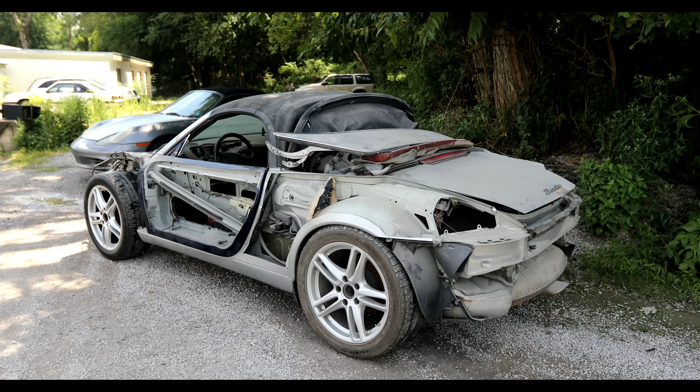We bought a Boxster for $500 and saved it from the junkyard. Then we took that Boxster, slapped a V8 into it, and are transforming it into a vintage supercar. This is Project Jigsaw. There is something major that needs to happen so that we can actually drive Jigsaw. And what that is, this trailing arm that we have mocked up needs to be remade and finalized. Otherwise, this thing is 100% undrivable because it's 100% unsafe.

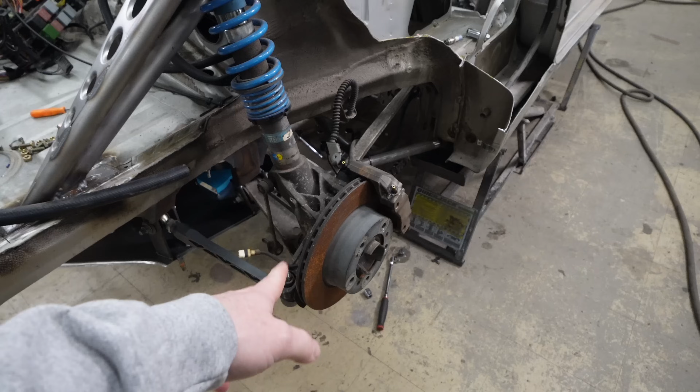Now, because we extended the wheelbase, we had to extend this rear trailing arm. Right now, it's just mocked up with some flat steel, just so we can lock it into place. But if we were to try to drive it, this would just wobble in and out, and it would be a complete mess and not work.

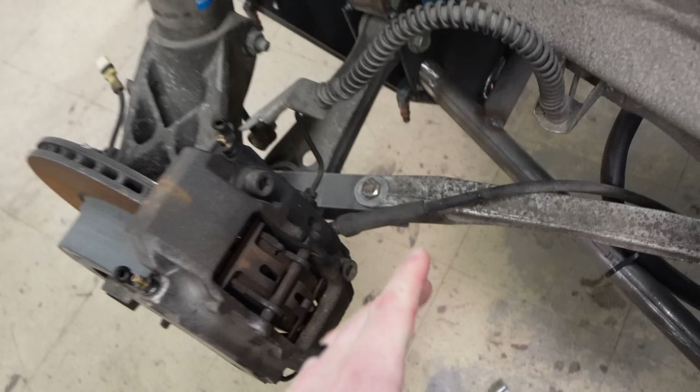So my plan here is to 3D scan the arm that we have mocked up, redo it in CAD, and then we're gonna send that file out to have it machined. It should save us a bunch of time, and it should be a really cool end product.

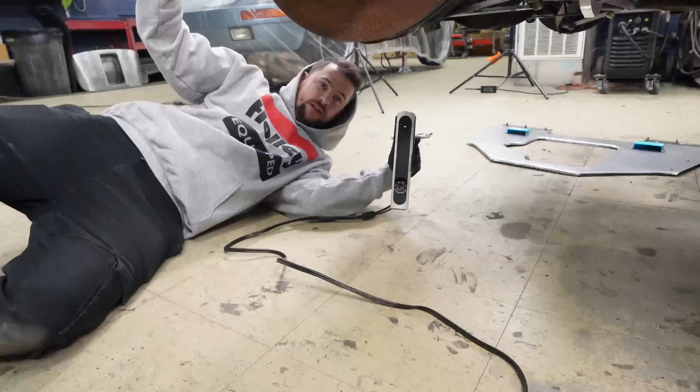Look at your hands on there, Tony. Nice. I want you to 3D print that for me. No.

Definitely gonna have to curve the arm. That's what these tests are for. Yeah, something like that.

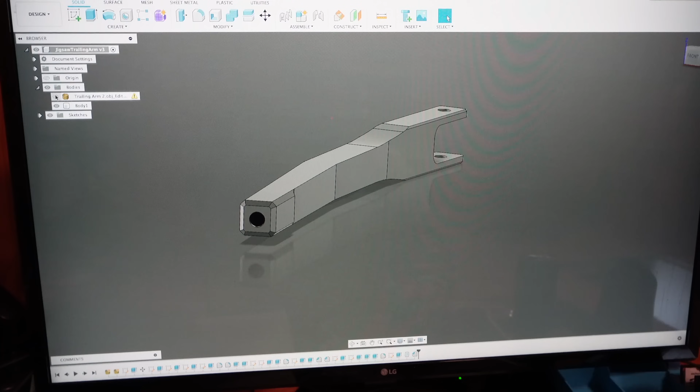Now that the arm is designed, I'm gonna 3D print it and make sure it fits before we pay a lot of money to have it actually machined. I got this print to be the exact height of the max of my Sidewinder X2 printer. So let's hope that nothing fails over the weekend. I'll check it on Monday morning.

There it is. Tony. Yeah.

All right, so here we got my bionic thumb with magnetic tip. I can almost pick things up without the rest of my fingers. Edward Scissor thumbs, but the Wish app version because it doesn't actually work. You know, it's just like the Bionic Man. You get damaged, and then you just build it back better. I mean, it's better than looking at your stupid thumbnail, or lack of it.

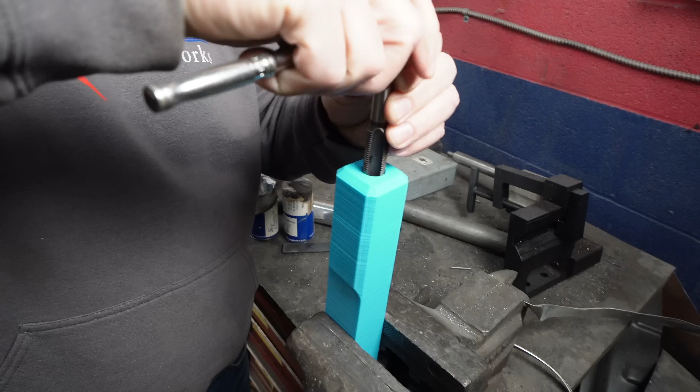We're gonna tap these threads because 3D printed threads are never that great for use like this. Tap's running in real easy though. Yeah, they printed really nicely.

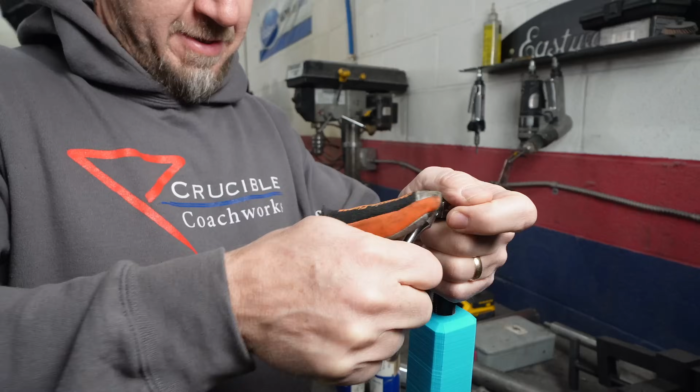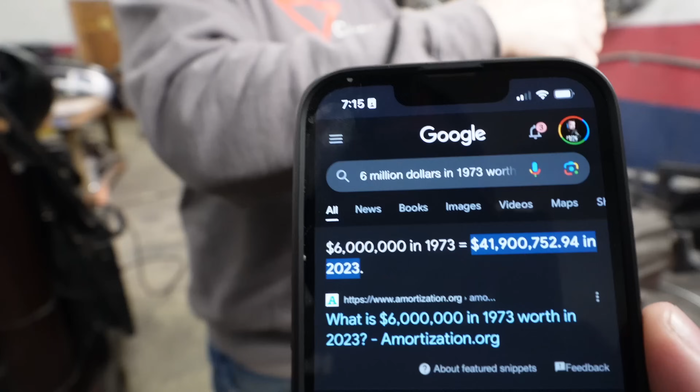I think Amos had it right though. You're the $6 man, not the $6 million man. I don't know if you can buy this for $6. In this economy, no way. How much do you think the $6 million man would cost in today's dollars? All right, so we're talking 1973, right? Okay. What do you think it is worth today? 64 million. You're way higher than I thought you would have guessed. It's 41.9. Okay. That's a lot of money. It sure is.

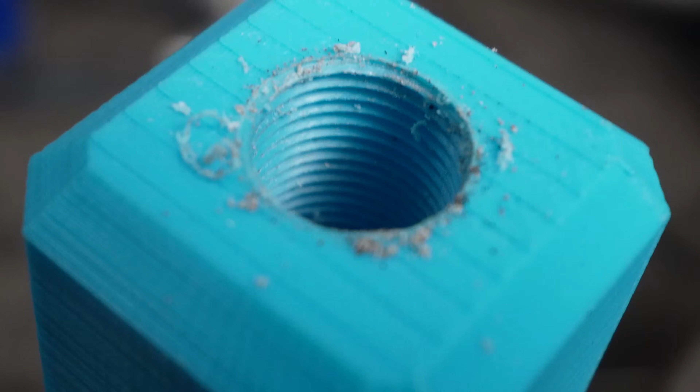There we go. That didn't even take that much plastic out. That's a clean print. So what we're gonna do here is I'm gonna super glue these two halves together. Then we're gonna use a soldering iron to melt it so it stays together, just because this is just mock-up. This is not actually gonna be on the car when it moves. The goal here is to make sure that this arm will function and clear everything. It's a good idea to do that before paying a company to machine expensive arms out of 6061 aluminum. It ain't cheap.

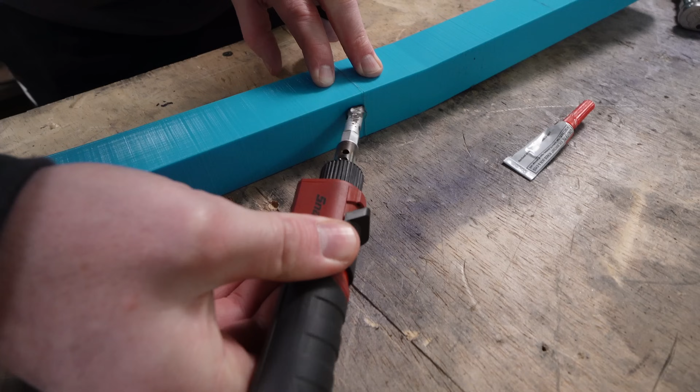Believe it or not. So I'm gonna use the soldering iron here while this glue is drying, which is probably already almost dry because it's super glue. I'm just gonna melt it. It'll help give it some rigidity so while it dries, it won't move. We also got these spherical rod ends to put on the end of the rod.

Wow, that was a terrible laugh. It was really bad. It was really bad.

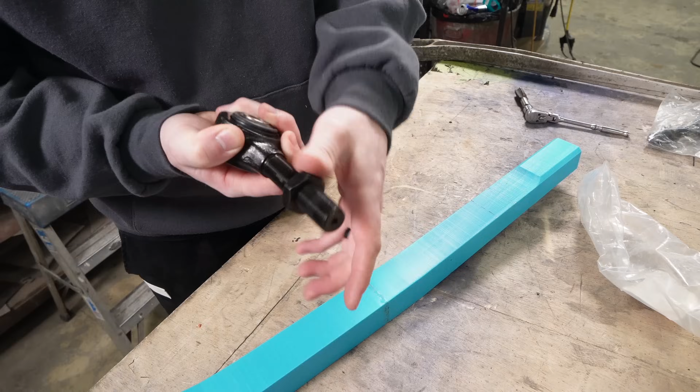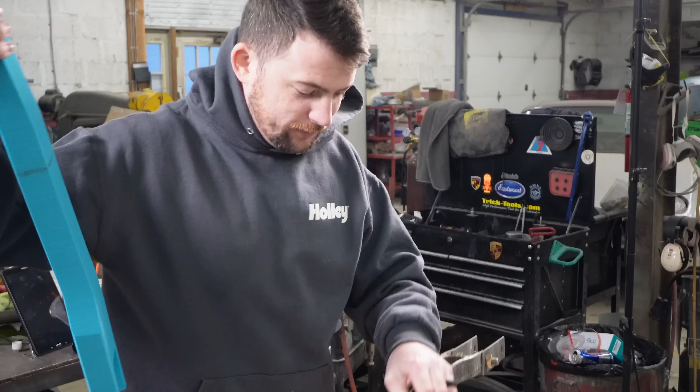So these will make this trailing arm adjustable, and we'll thread in the end of the trailing arm here, provided that Tony tapped it correctly. That's not really a concern. I don't know which way to take that. We have our original arm here. I'm going to thread this in to be the exact length.

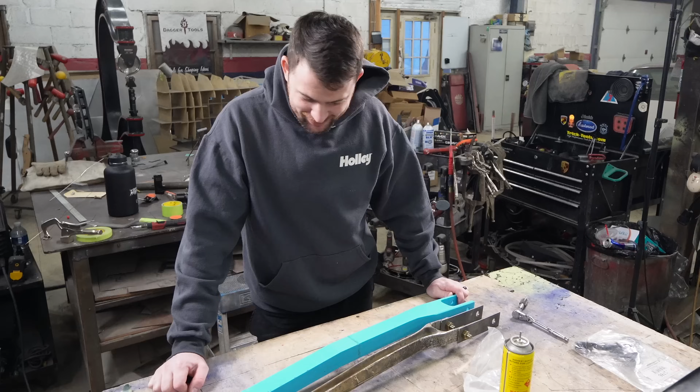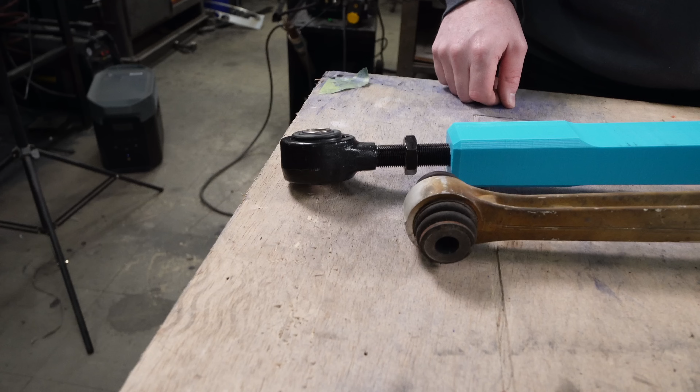Oh boy. That's what these tests are for. How did that happen? Unless our scan was that far off. I left a good bit of room so this would thread in and still have thread sticking out and be there. Yeah. Dang it. Back to the drawing board. Yeah.

In the recent videos, you've probably noticed the new nature B-roll. Well, that comes from me because roughly every day, about lunchtime, I go out for like a 10-minute stroll to kind of reset, especially when things happen like 3D prints are way off. Now, I've seen comments asking, is that on the property? Yes, everything that's in this B-roll is on the property, whether that's customer cars we're working on, bits of machinery around here because this used to be a quarry, and also because we're right beside a nice wooded area and there's tons of cool animals out here, and it's just refreshing to come out here and shoot some footage and take a little breather.

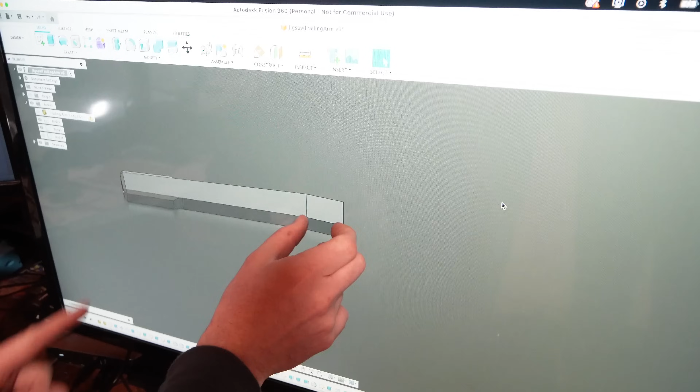Yep. So I think what happened when I printed this file, I printed it in half. I chopped it in half, printed two halves. However, it wasn't in halves, it was in thirds. And I think I left part of the third behind. So the first print was this segment plus this little extension, right? The second print, I think I did this and left that extension.

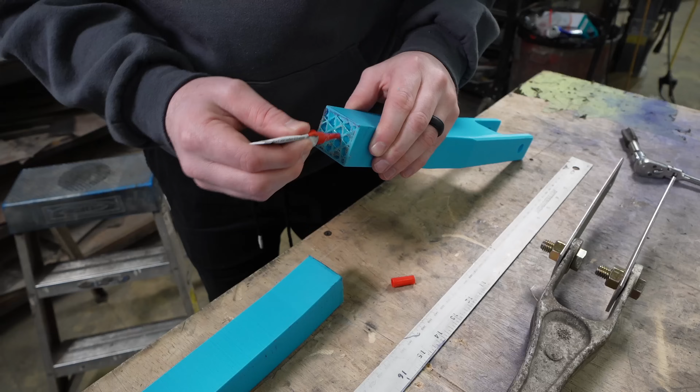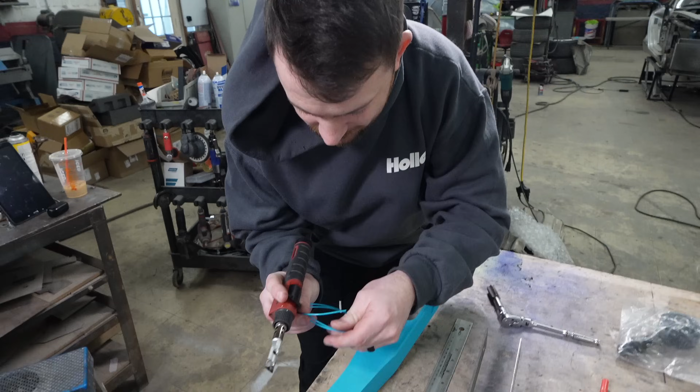I mentioned this before on the channel, but using a piece of filament from the printer, you can use it like filler rod when you're welding. It's okay if it's not absolutely perfect.

Doesn't look like a stack of nickels. You don't look like a stack of nickels.

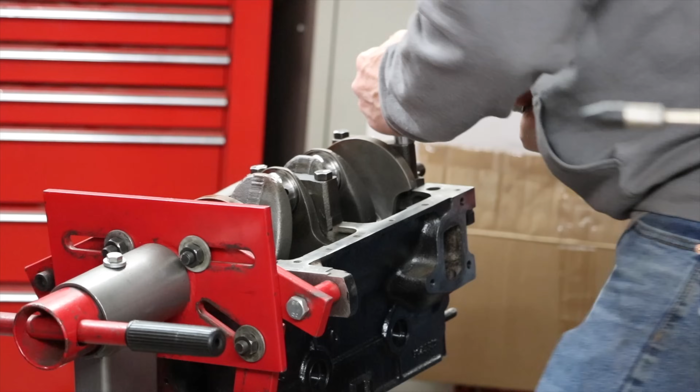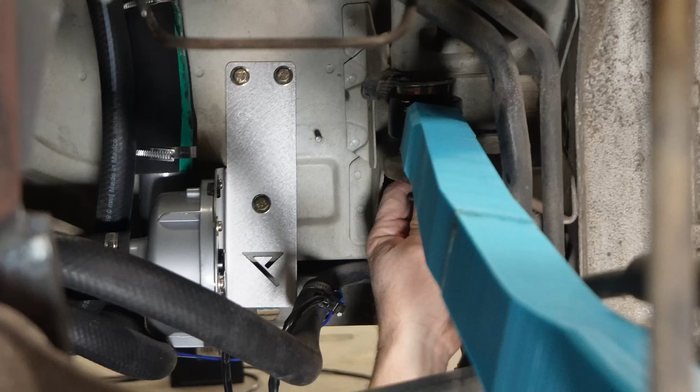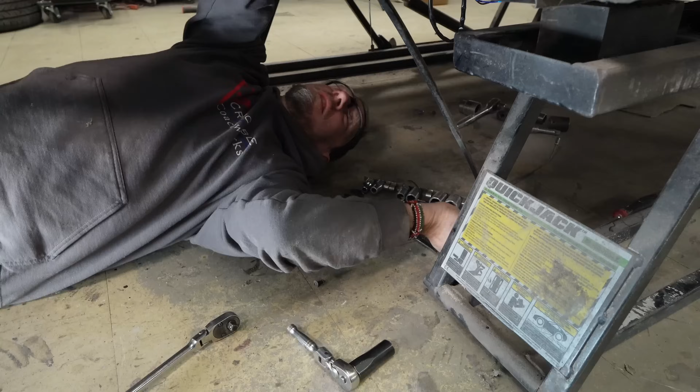Gotta pick it up slow. Ah! Every time it's filmed, it doesn't want to work. I'm trying not to horse this around too much because it's a plastic arm. If it dies, Tony, okay, we can reprint another one. I mean, so far it seems to fit.

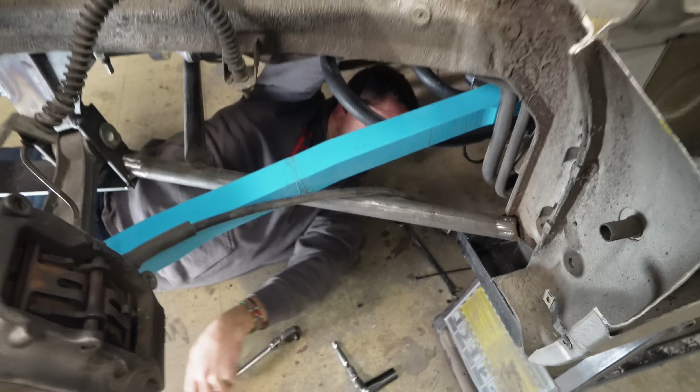Yeah, I mean, honestly, I want the satisfaction of bolting it in completely, but I think it's proof that it fits. Close enough. If it fits, it ships. Yeah, we just gotta get this bolt to line up.

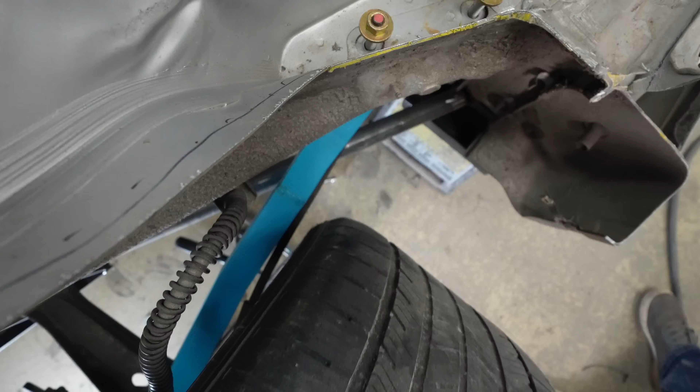You know, there is something inherently cool about making your own parts that aren't just sheet metal body parts. Yes. It is a satisfying piece to see in there, even though we know it can't stay like that. I mean, we could test it. No. I know that will fail.

Is it worth testing something you know will fail? I mean, I test your patience all day, every day. Does it fail? Sometimes. You're still here.

Fair. All right, so we know the piece that we designed is going to work, but the piece that we printed will not. So we contracted a company to machine the part that we have made the file for, because we don't have a large CNC machine. In the meantime, we want to get this thing rolling, and while we wait for that part to come in, we're going to reinforce the temporary pieces that we made so that they can actually drive rather than be pushed around. This is a service to the viewers.

Yeah. And my heart needs that. It needs to see this thing, like, I need to push the pedal and feel this car go.

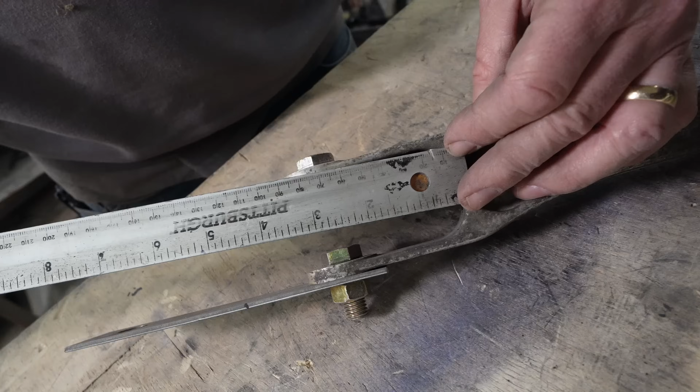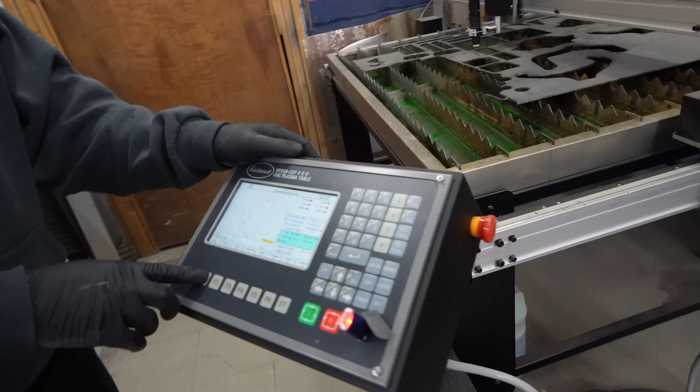One thing that's nice about the new Eastwood VersaCut plasma table is it has a built-in shape library. So I can go in here, hit shape library, I can choose any shape I want. So for example, I can choose a square right here, right? Select it. And then on the square, there's 2 dimensions. I can input manual dimensions, and if we can cut it out, then we'll have the plates we need to reinforce the trailing arms.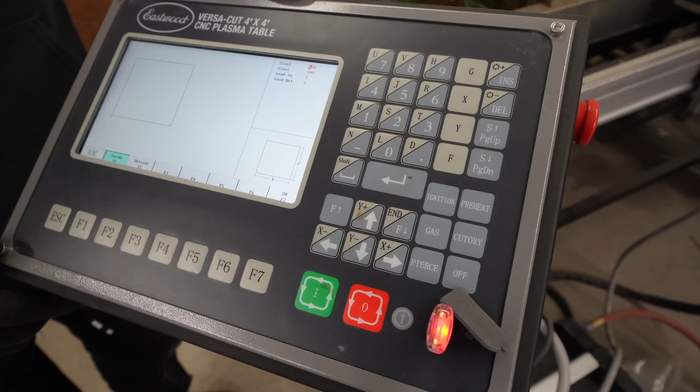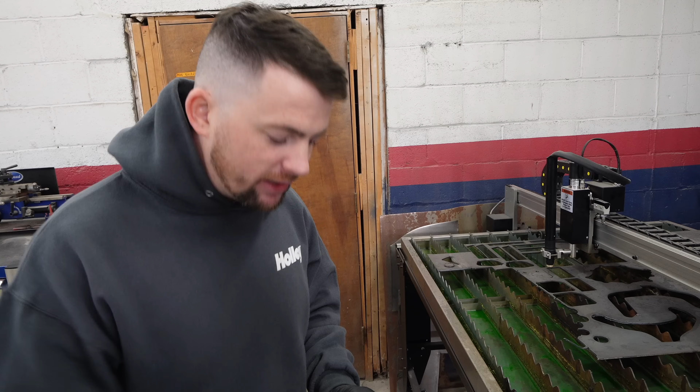It's a handy feature that saves you from having to go, for me anyway, all the way back upstairs, do the CAD work, put it on a flash drive, come back down, put it back in, all just to have a rectangle, when I can just do it right at the computer in the machine.

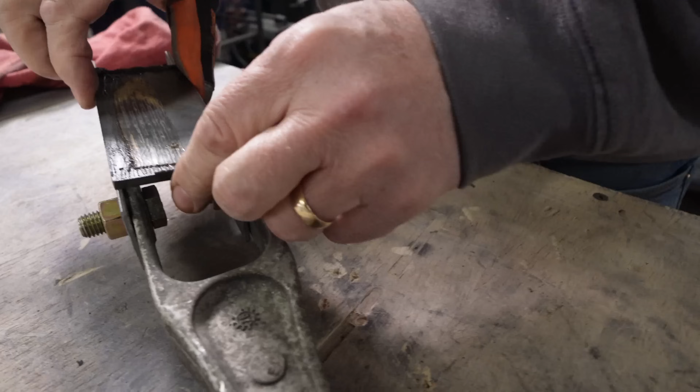A little overkill, but I think it'll work. Now we got to cut 3 more out. I'm thinking, you're gonna cut 3 more out. It's your turn to try and learn how to use the plasma table. Yay! I taught Tony how to use the table. Let's see if he can actually do it. I'm not gonna tell him anything. We'll see if he can do it.

All right. Can you teach an old dog new tricks? I already forgot everything. Well, the rectangle's already made. All you need to do is locate it on the plate. Right. And then cut it 3 times. Right. I'm looking for the button that locates it on the plate. Oh, big brain Tony. Yeah, I want to find a spot on here that this can actually get cut out of. So...

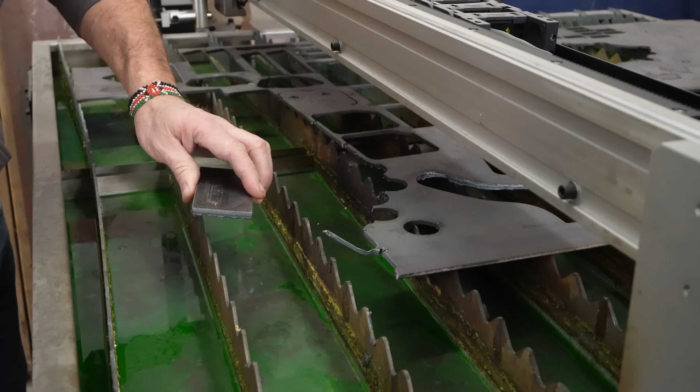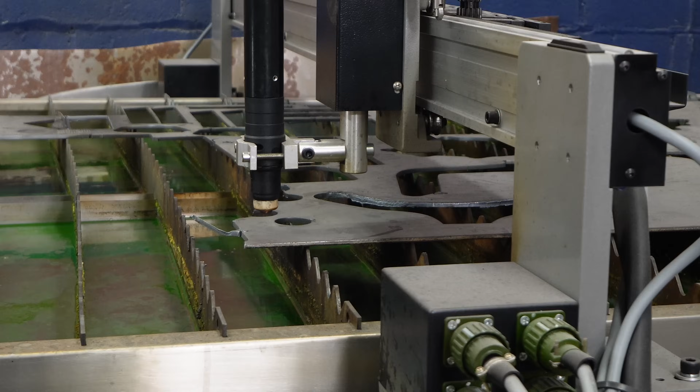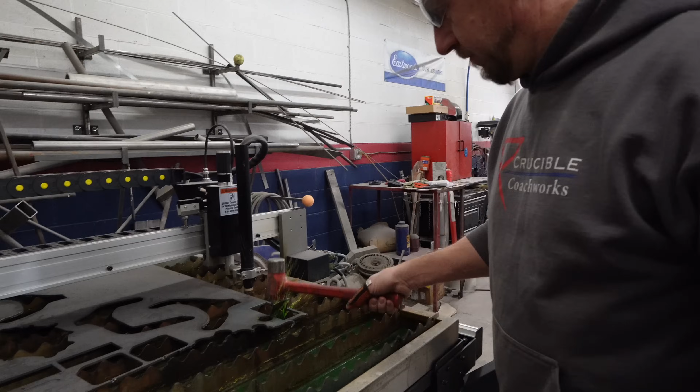There you go. He did it. Tony doesn't waste material, Miller. I like it. Yeah. I just splashed myself. Let that sit for a minute. Not bad.

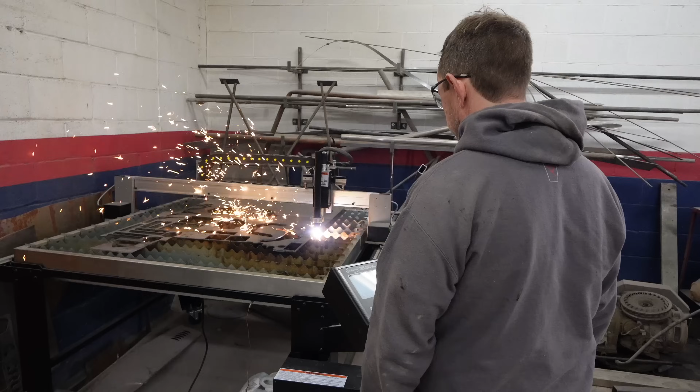Actually, just 1 more, right? 1, 2. Yeah, 1 more. Ah, Tony with a 10-degree angle cut to fit it in there and actually fit. Good job. Yeah, thanks. He already leveled up. Yeah.

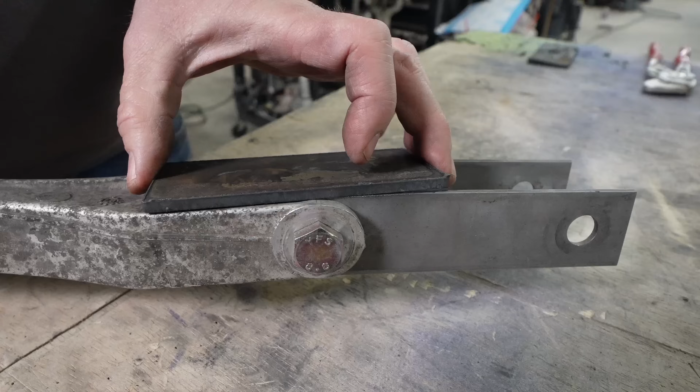All right, so we had these pieces on here that were temporary and helped us to roll it around, but there's the potential for this to rotate on that bolt. And obviously it's not that thick and it can flex this way. So we made these little plates so we can weld them on there. They're gonna sit against the arm here on either side, and that'll help keep it from rotating. And then obviously when that becomes a part of this, this will help support these this way so that they're not trying to flex so much.

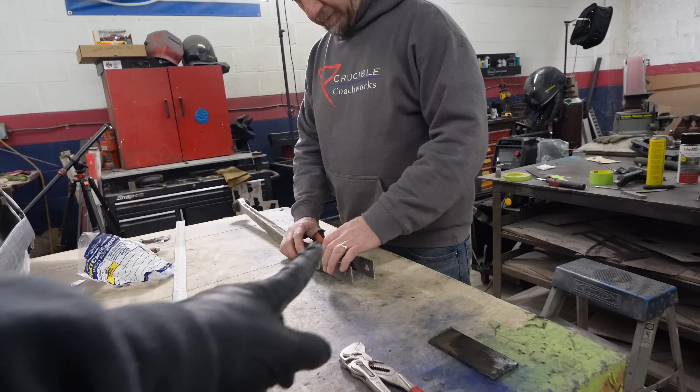Gotta love temporary. Yeah. Disclaimer, don't try this at home. This is also not going on a public road. Yeah, this is just for our own enjoyment and yours. It's also the trailing arm, not a control arm, so it's really not doing a whole lot. Yeah, it's keeping the control arm from shifting forward and back, so it's not going to have a lot of load placed on it anyway.

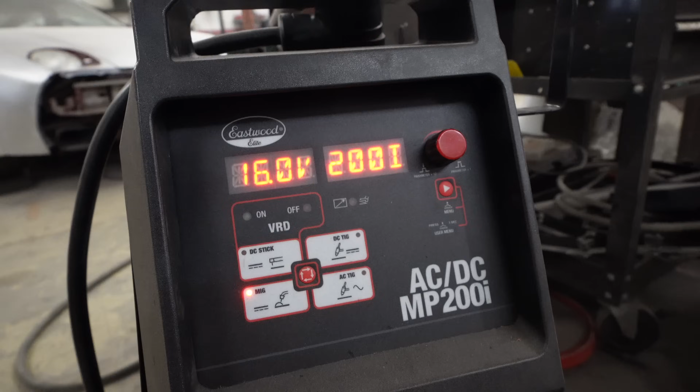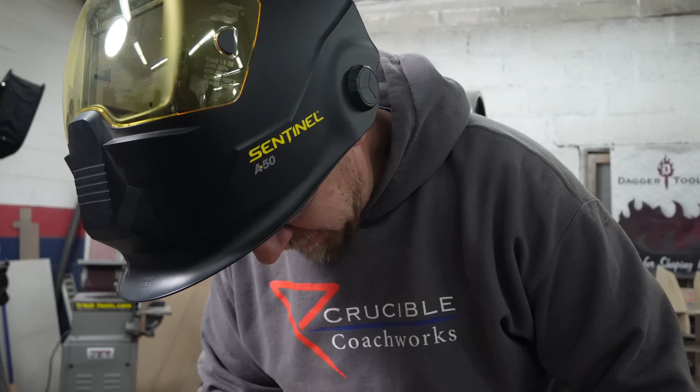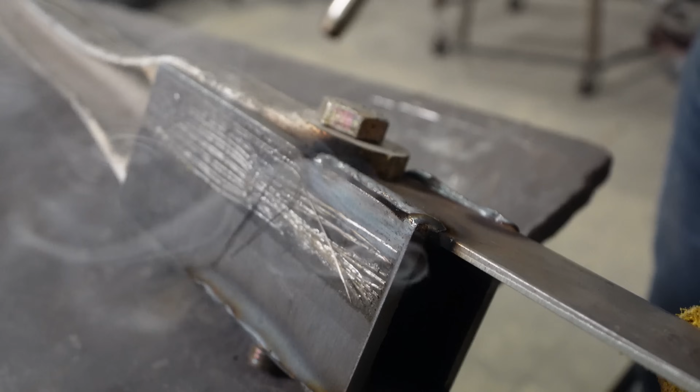Put this glove on. Get that hand in there. You know that you're doing the fab work when someone's wearing gloves and they're welding. I set a bad example sometimes. Yeah. Just weld through that tape, it'll be fine. Yeah. Right through the tape. It smells terrible. All right. That should be pretty solid.

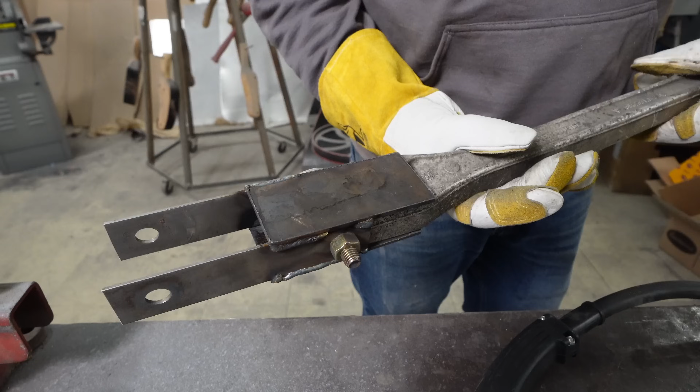That's not going anywhere. It's like an orc weapon. You gotta put this on. Yeah, look at all that great... It's so barbaric, but it'll work. It is. Look at those welds. Yeah, I couldn't see. My bifocals were in the wrong spot.

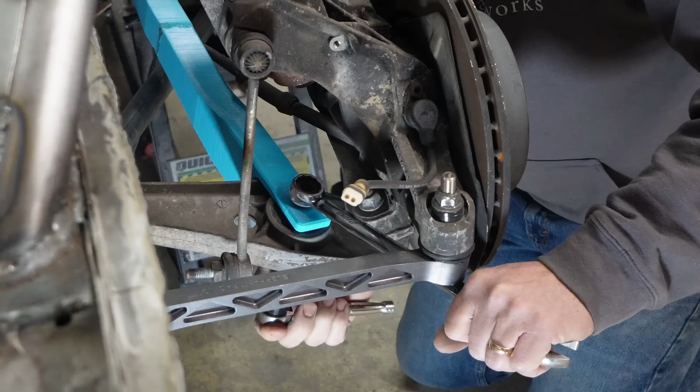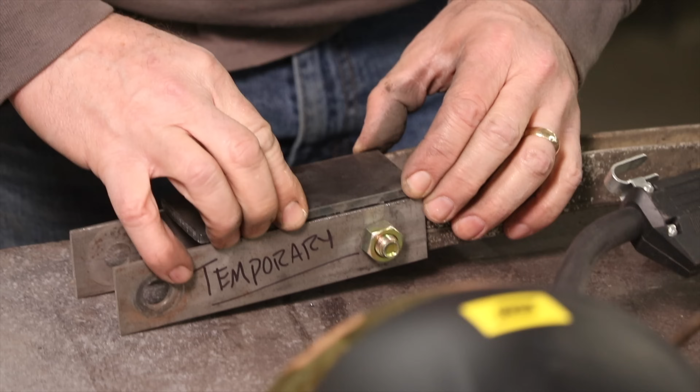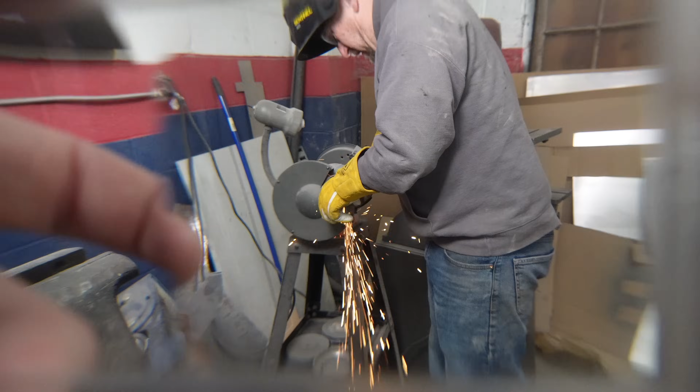I won't say it this time. About how old I am? Here, try this. All right. Your bifocals won't work in there. No. This will. Yeah. All right. I need my bifocals to put it in.

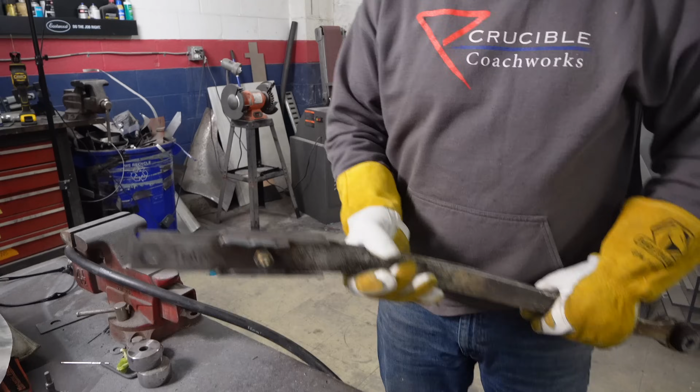It's much better when you can see. Yeah, it looks a lot better. Yeah. So I actually got that for you sooner. That's not the last 2 welds. Yeah, that's all right. It's temporary. Mm-hmm. Look, now you can dual wield. Yeah. Where's my other one?

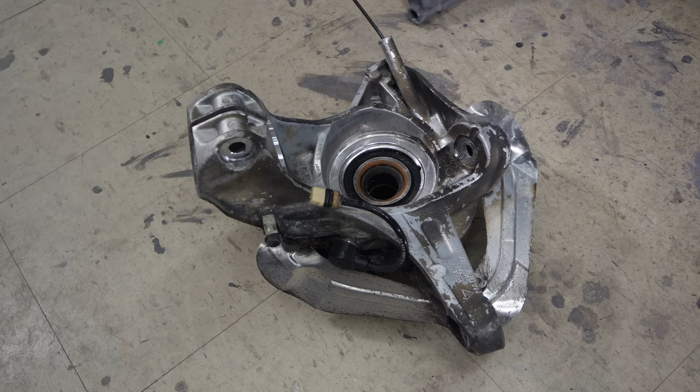All right, so our caster arms are ready to install, but before we do that, our new used uprights showed up that we need for our axles. So we're gonna do that. Before I install these, I'm gonna make sure that the larger axles actually fit. Yeah. Yep. Look at that. And check the other one too, just in case they're used.

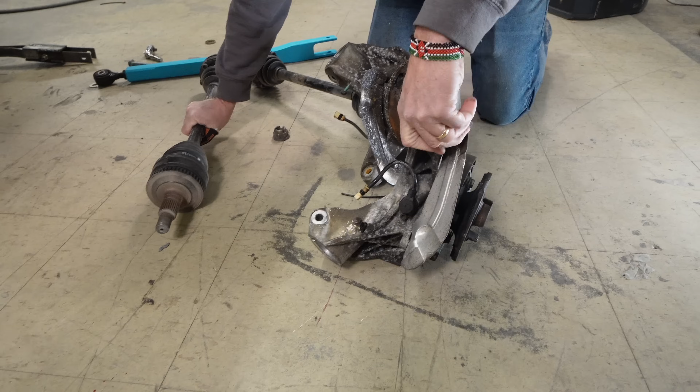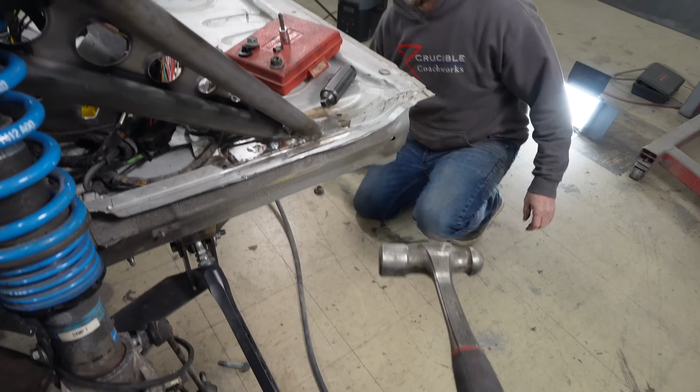Yeah, exactly. So, trying to get them as quickly as possible, I started looking around on eBay, and I found people advertising all kinds of uprights that definitely would not have fit. They were labeling Boxster Base, Boxster S, and 996 all as being the same, and they're actually all different. But these came from a reliable source, and that proved out to be correct because they fit. Nice. Well, let's put them on. Okay. Yes, I'm that good. All you needed was a little bit of hammer persuasion. Yeah. Don't worry, I got you. Yeah, you're quicker to reach for the hammer than I am.

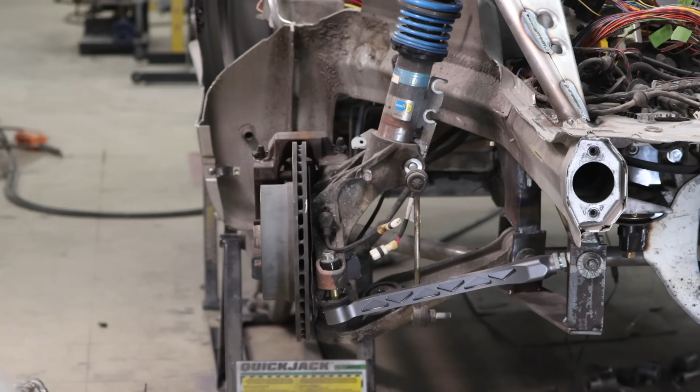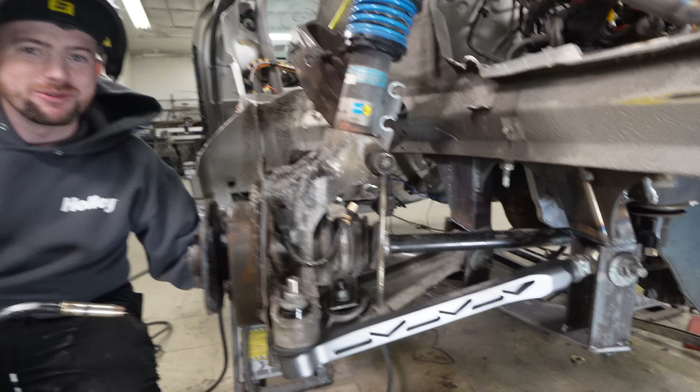So another major thing that needs to happen before we drive this is the entire lower subframe and the engine carrier and other braces. Most of them are just tacked on right now, which is not going to be conducive to a safe first drive. Oh, there it is. Look here, it's just kind of tacked and you know it's not ready to drive. So I'm gonna run through. I'm gonna weld all these spots that need attention.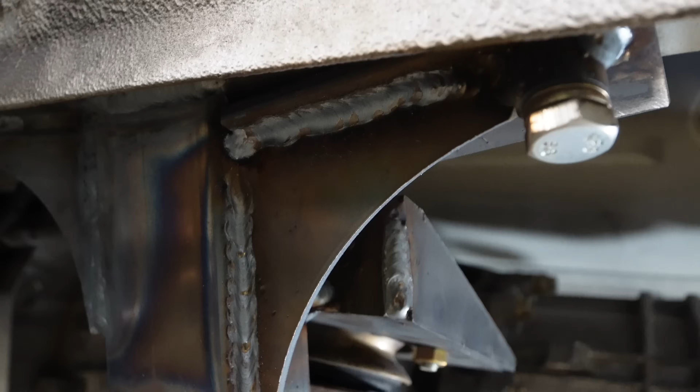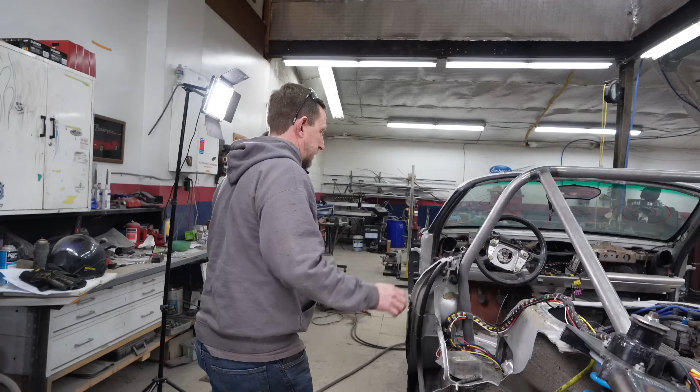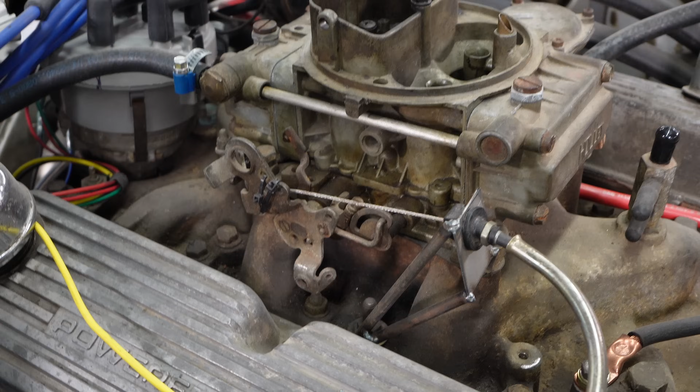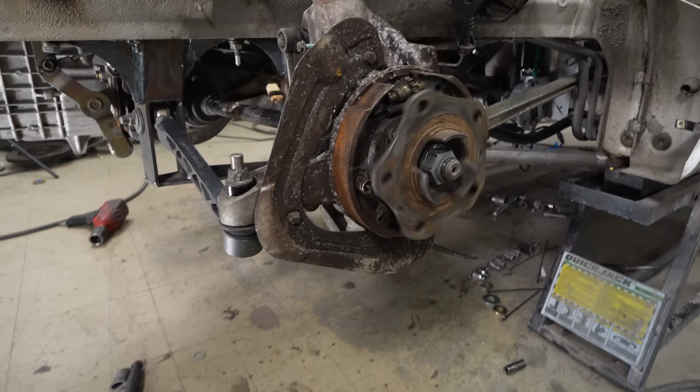This does not look good, but we want to start it. Hop up in there, Tony. Okay. Let's check out our throttle actuation and stuff too. Does the throttle work? Yeah. Look at that. I couldn't see where the axle's moving. Oh, they were spinning, baby.

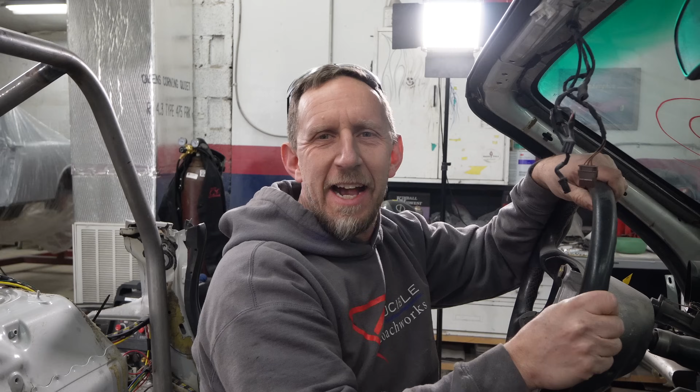Nice. All right, so it may have been obvious, but there were no brake rotors on there. We're still waiting on them to show up. They need to be Boxster S as well to match the new knuckles. So when they show up, we can actually, for real this time, drive this car. This is just frustrating. Yes, but that's what happens when you can only work on it part-time.

We are very passionate about both building cars and also making videos on that. And that also means that we show everything, the wins, the losses, the problems, when parts aren't here when we need them, the whole kit and caboodle. But we're doing this part-time. We come in real early in the morning and then we have to stop so we can get back and work on all of our customers' cars and try and keep them happy too. We're doing this in real time. If you're watching it on Saturday, we were probably doing it on Thursday. Or Friday. So if our progress seems slow at times, it's slow for us too, but thanks for sticking along for the ride.

But as close as we are now, even worst case scenarios, I just can't see any way that we aren't driving this by next week. This project in particular means a lot to me. We're using my dad's engine. We're building a car that is inspired by a lot of cars that he loved. And so we really appreciate that you're spending time with us as we go through this build. And we know how valuable your time is. So from the bottom of our hearts, thank you.